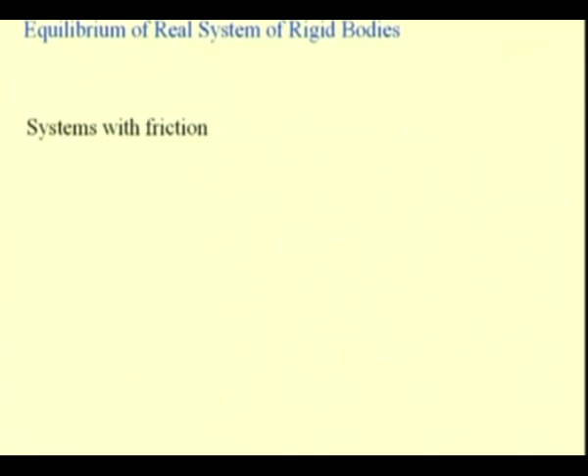Friction does negative work since it always opposes motion irrespective of the direction of the motion. We have seen that irrespective of the nature of the motion, friction always tends to oppose it, and thus if we consider any virtual displacement, friction will act against that displacement, causing negative work.

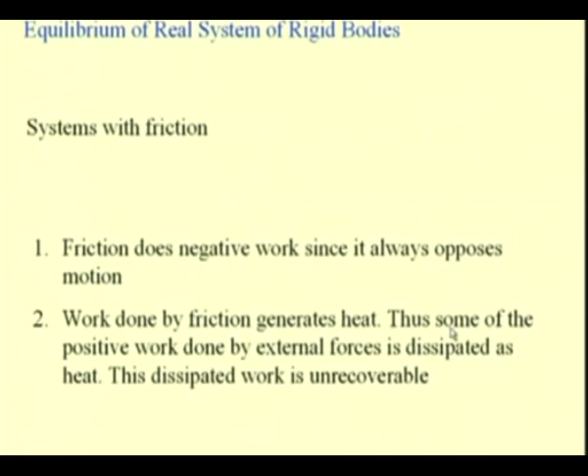The work done by friction generates heat, and thus some of the positive work done by the external forces is dissipated as heat. This dissipated work is unrecoverable and thus causes the inefficiency of a system. Because of friction, some of the work done by external applied forces is dissipated as heat, and this is unrecoverable.

So let us consider the block with friction sliding on a surface, which we have used to analyze friction problems. Here we see a block with weight W and a force P being applied to move this block against the surface. The contact has friction, denoted by this force F. This is the normal reaction N that supports the weight.

Let us assume that this body is under equilibrium, meaning this force P is less than the maximum allowable force that exists as friction at this contact surface. In that case, we can analyze this problem to find the unknown force F by considering a virtual displacement.

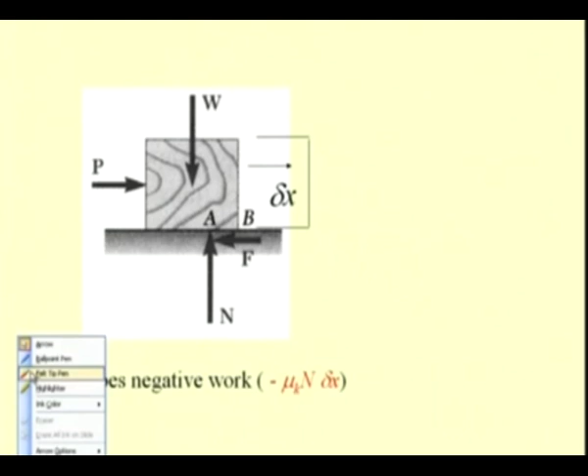But if the problem is to analyze the efficiency of a system with friction, or to find the efficiency of this way of pushing the block across the surface to move it from one place to another, then the object is actually in motion and the force P is more than the limiting value of friction available at this contact. So this frictional force F in such a case will be the dynamic or kinetic friction, which will be equal to mu k times N.

Now, if we would like to know the work done by this frictional force, let us consider a virtual displacement delta x in the forward direction, or the direction of the applied force. So the work done by this applied force is P times delta x. This is the input work.

This is virtual because we are considering a virtual displacement delta x, and the friction force, which acts in the opposite direction of the applied force for the same virtual displacement, does negative work equal to minus F times delta x, which is the work done by friction, and in this case it is minus mu k times N delta x. So our equation of virtual work, where delta U equals zero, states that P dot delta x minus this work done by friction, mu k times N delta x, is equal to zero.

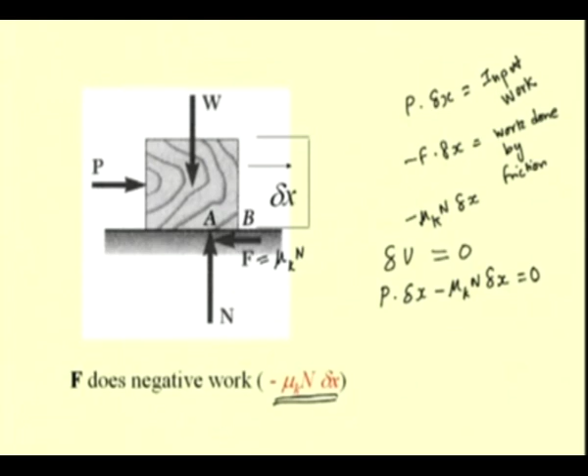So here we see that this negative work term comes into the picture, and the input work is consumed by the friction that exists between the surface and the block.

Let us consider another case where friction occurs in the bearing. We have already seen that the bearing resistance has to be overcome when a wheel is rolled on a surface, and for this moment M to exist, there will be a frictional force F at the point of contact between the wheel and the surface. But if we assume that this point A does not slide, then for any movement of this wheel, this force F does not do any work, because there is no sliding taking place at A. But we see that this frictional moment M has to be overcome at this bearing surface, and thus the negative work is done not by this frictional force F, but by the frictional moment that exists in the bearing.

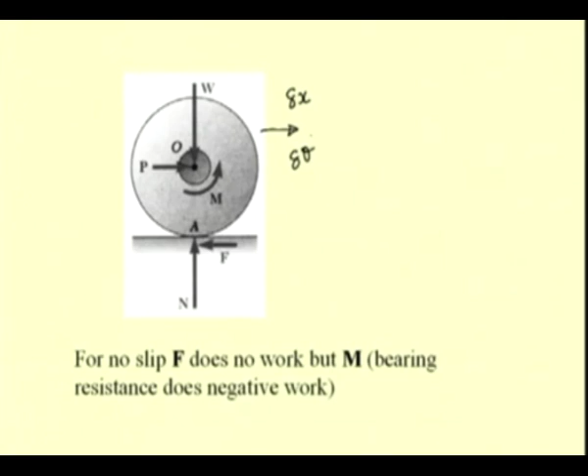So if we consider that this wheel moves forward by a distance delta x, for this virtual displacement let this wheel rotate by an angle delta theta. For a virtual displacement delta x, it is possible to find this virtual angular displacement delta theta if we know the radius of this wheel, and then we get the relation between delta x and delta theta. This is a single degree of freedom system, so the input work is equal to P times delta x, and the work done by friction, in this case the bearing friction, is equal to this frictional moment M times delta theta.

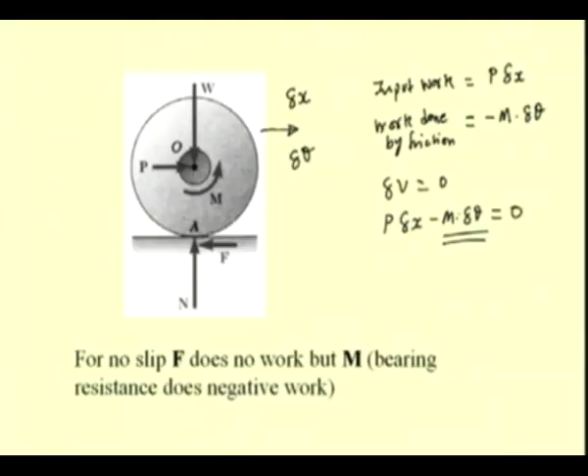The negative sign comes from the fact that the wheel is rotating in the clockwise direction and M is in the anti-clockwise direction, so the work done is negative. From our virtual work principle, this total work done is 0, so we have P delta x minus M dot delta theta equal to 0, and this is the negative work done by friction. So in real systems we see that a negative component of virtual work exists for each of the frictional effects, either sliding or in case of pure rolling motion.

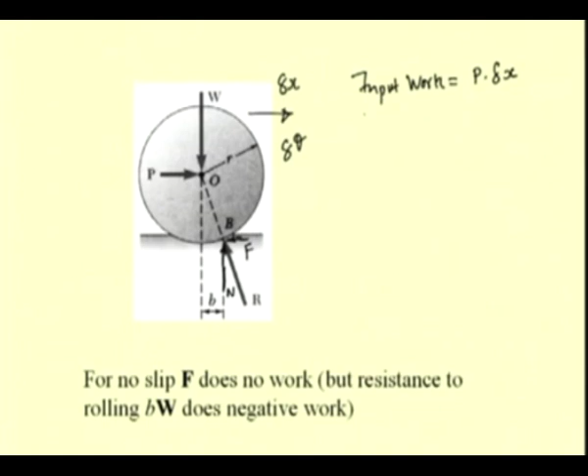and the negative work done by rolling resistance is given by the rolling resistance bW times delta theta, which is a negative work. This comes from the fact that the rotation is in the positive direction, that is delta theta is in the clockwise direction, and we have this moment in the anti-clockwise direction. The moment of this force is in the anti-clockwise direction about this point B. So we have the total work, that is delta U equal to 0: P dot delta x minus bW dot delta theta equal to 0.

So in this way we can see that the work associated with friction or rolling resistance is always a negative work, and it is to be accounted for in the virtual work equation if we are interested to determine the equilibrium condition or to find some unknowns. And this negative work is not recoverable, it is lost as heat. In case of rolling resistance, this heat is released by the expansion of the compressed or deformable material, so again this work is not available.

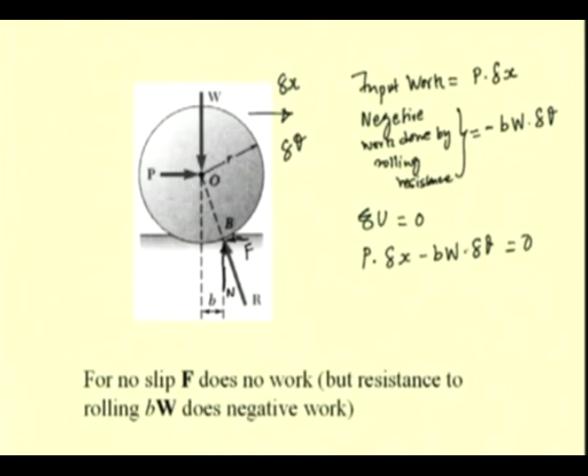So with this understanding, let us try to see how friction acts in the joints of connected rigid bodies. Here you have this link, two links connected at this joint. Let the two links for this particular position be at an angle of theta, and let us assume that there is a virtual displacement of this link in this direction - this is the positive direction of the virtual displacement. So if friction exists here, if we are considering the effect of friction at this joint, then the moment due to this friction does negative work when we consider this virtual displacement.

So for a better understanding, in this picture we have dismembered the assembly in order to account for this frictional moment, because if we take the free body diagram of the complete assembly, the frictional moment cannot be accounted for. So we have to dismember it in order to account for these forces, which become now active forces, thus doing the negative work in each of these bodies.

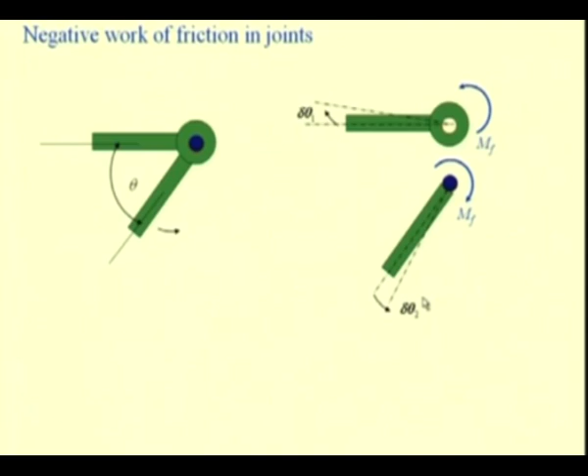Same way, the link that is shown here moves in this direction, that is delta theta 2, for the positive virtual displacement, and this frictional moment MF is again against this delta theta, where MF is in the clockwise direction and delta theta 2 is in the counterclockwise direction. So, we see that always this frictional moment is against the virtual angular displacement that we are considering.

So, if you would like to find the total work done by these frictional moments, that is delta u, is equal to, since both these are against this virtual displacement, they have this negative sign: minus MF delta theta 1 minus MF delta theta 2, which is equal to minus MF times delta theta 1 plus delta theta 2, which is the total virtual displacement that we are taking for the particular joint.

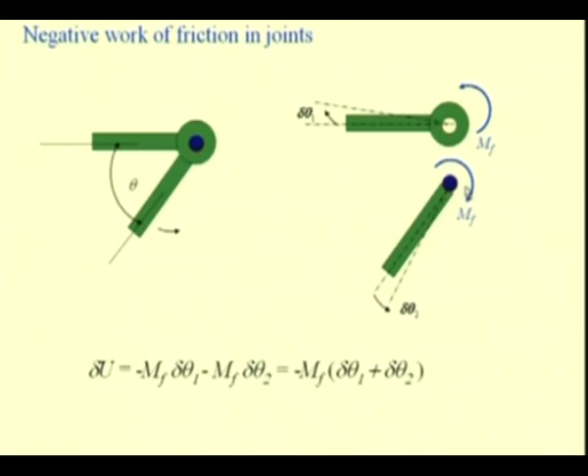So, this has to be accounted for in the systems when we analyze real systems, when we consider friction to exist in the connections between the various links.

Now that we have seen that the friction dissipates energy in the form of heat, we can define the efficiency of a mechanical system as the ratio of the available energy to the input energy, where the available energy is nothing but the input energy minus the energy lost because of the heat dissipation due to the presence of friction. So, in all systems where we have either the sliding action or where we are considering the bearing friction, as in this case of the joints,

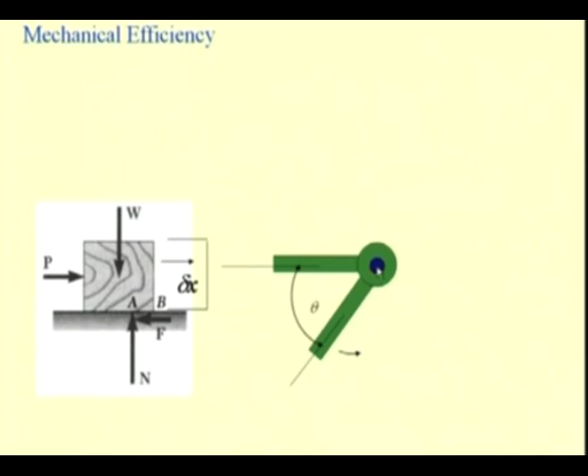we can account for the work done by these frictional forces and compute efficiency as the work output divided by work input, where the work output or the work that is available is equal to work input minus work done by the friction,

and this work done by this friction is minus F delta x, as in this case where the block is sliding, and here as we see in this revolute joint where we are considering the bearing friction in the joints, we have the work done by the frictional moment MF, and we have the work done by the friction as minus MF delta theta. So, these terms have to be accounted for and we can find the efficiency of the mechanical system.

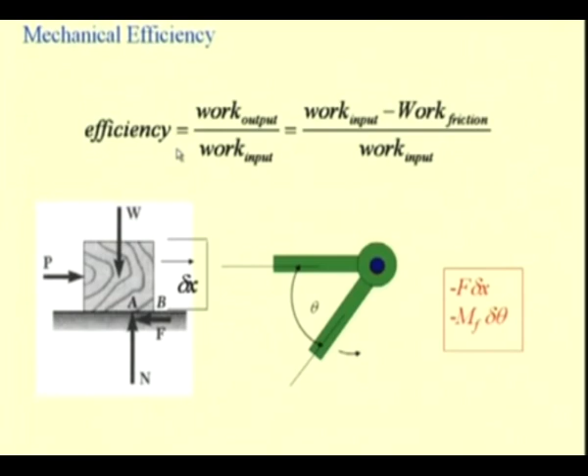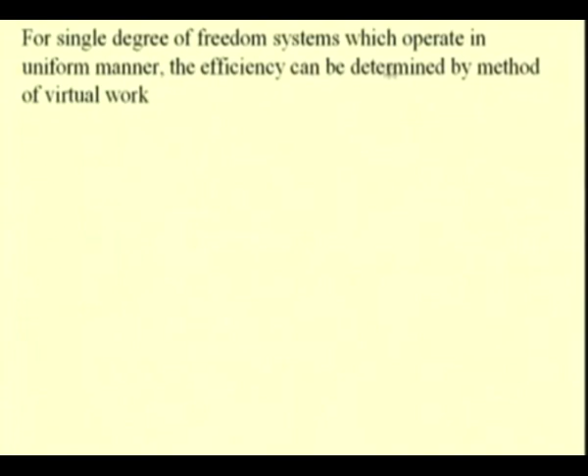So, for single degree of freedom systems, in this discussion we will limit our analysis to single degree of freedom systems that operate in a uniform manner. The efficiency can be determined by this method of virtual work. So, we will see a few examples.

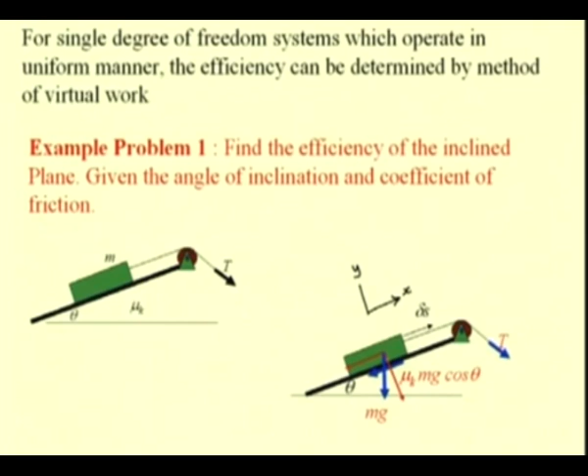So, this force T does work by displacing this cable by this virtual displacement delta s. So, we have accounted for all the forces, that is the tension or the force that is being applied, and the weight of the block being raised, as well as the friction between the block and the inclined plane surface.

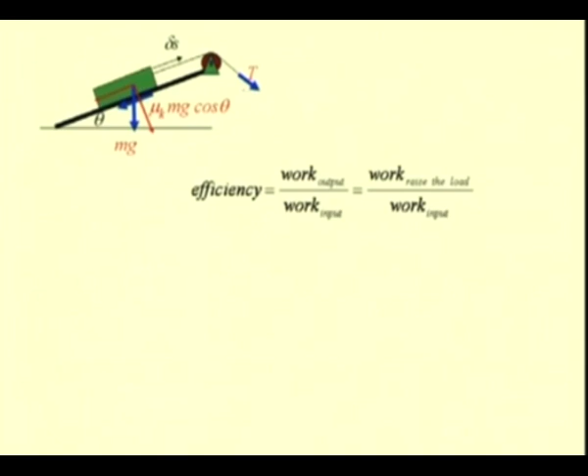So, now let us write the virtual works that are involved for this virtual displacement and find this efficiency by writing that work output, which is nothing but the work that is used to raise the load, and work input is nothing but the work done by this force T for raising this load.

We can write the work done to raise this load as mg sin theta delta s, which is the component of this weight mg in the direction of delta s, divided by the input work, which is T times delta s. If delta s is the virtual displacement of this block, then this force T is also virtually displaced by an amount delta s. So T times delta s is the work input, and the work output is the work done to raise this weight, which is mg delta s sin theta. Dividing this by the input work T times delta s gives the efficiency.

So that is the input work. What are we doing? We are writing the work input as the work done to raise the load plus the work of friction.

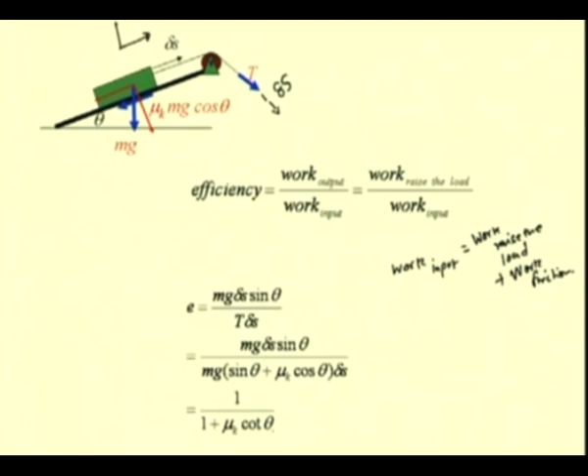Now we can remove these common terms and find this efficiency as 1 by 1 plus mu k cot theta. So we see that this method of virtual work can be used to find the efficiency of a system.

Let us consider another example where the working principle of this screw jack depends upon the friction available between the square threads and the base. We have already solved problems on this screw jack, but here we are interested to find the efficiency of this screw jack in raising this load.

So let us consider here a screw jack with a helix angle of alpha, the friction angle let it be phi k, or the coefficient of kinetic friction is mu k and the corresponding friction angle is phi k, and the mean radius of this screw is r. Input moment m, which equals P times this moment arm for the force applied on the lever, is given to raise this load W by, say, a virtual displacement delta S.

So let us consider that this weight is being raised by a distance of delta S when this moment M acts for an angular displacement of delta theta.

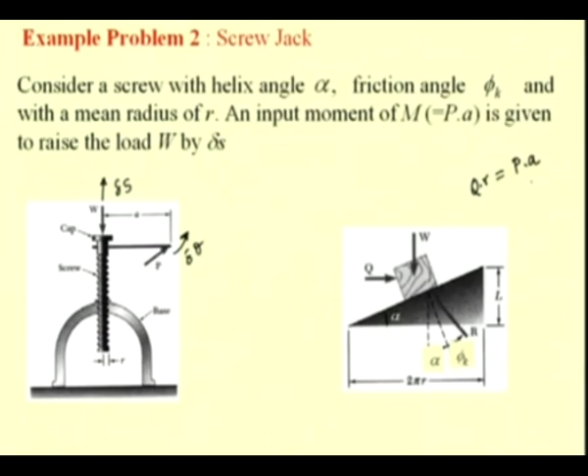Now let us write the virtual displacement. Let this weight W be raised by a virtual displacement delta S. This delta S equals R times delta theta divided by 2 pi r, times L.

We know that if the screw rotates for one complete rotation, that is 2 pi r, the load is raised by a distance L. So if the screw takes a rotation of r delta theta, then this is the virtual displacement, or it equals r delta theta tan alpha.

And we also know that for the raising load on this inclined plane, Q by W equals tan of alpha plus phi k, the angle of kinetic friction.

So now we write that M delta theta, which is the input work, equals Q times R delta theta, which equals W times tan of alpha plus phi k, times R delta theta, because Q can be written in terms of W tan alpha plus phi k from this equation. And we know that M, which equals P times A, is also equal to Q times R. So this is the input work.

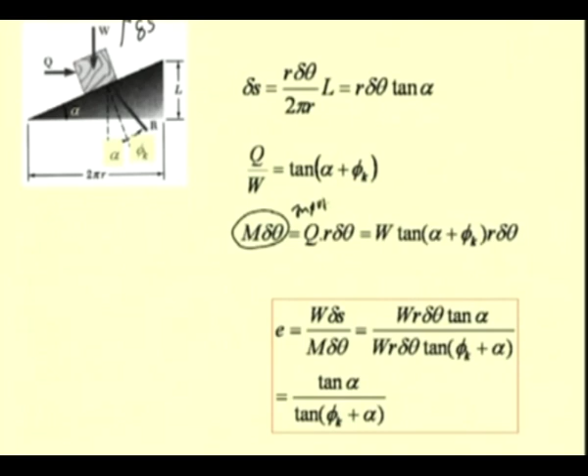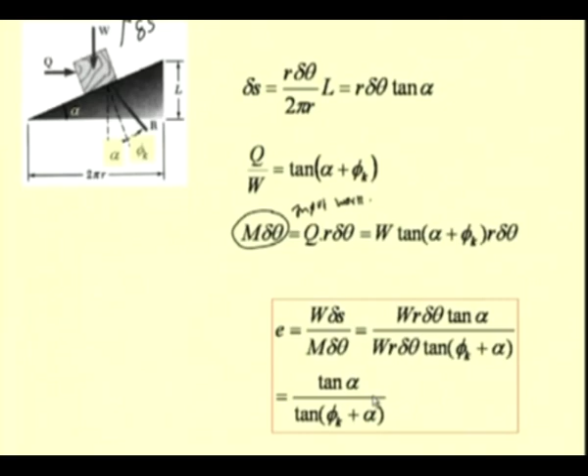Efficiency can be defined as the work done to raise this load, that is W times delta S, divided by the input work, which is m delta theta. So W delta S equals W R delta theta tan alpha, which we substitute, divided by m delta theta, which we found to be W tan alpha plus phi k times R delta theta. Removing the common terms, we get efficiency as tan alpha divided by tan of phi k plus alpha.

Similarly, it is possible to find the efficiency of the screw jack when the load is being lowered, in the same way as we proceeded for this problem. So we see that this concept of virtual work can be effectively used to compute the efficiency of the mechanical system.

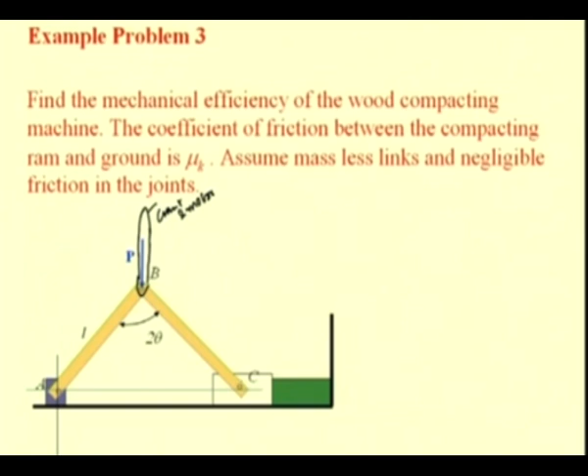First, let us construct what is called the active force diagram, where we consider all the forces that will do work when a virtual displacement is given. You have to remember that in the case of real systems, you also have to consider the frictional forces that exist in the active force diagram, because these frictional forces cause negative work.

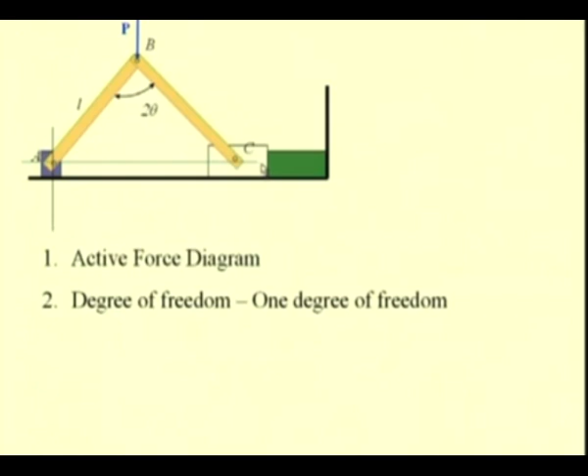Then we have to determine the degree of freedom. In this case, we see that this system is a single degree of freedom system. That means the position of these various links, say AB, BC, the position of this ram or the position of this joint B, can be uniquely defined if we specify this angle. Let it be 2 theta, or we can take another coordinate, say the coordinate of this B.

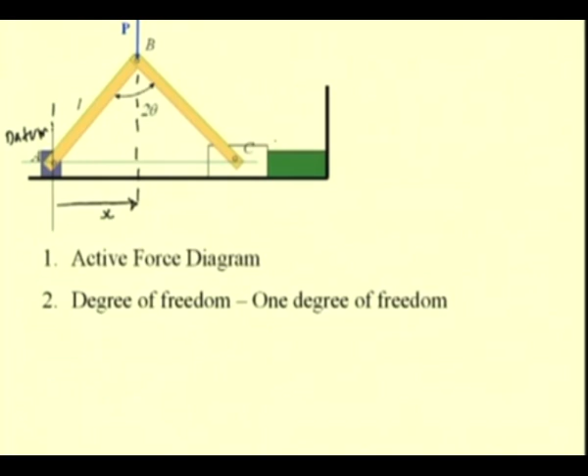From this datum, say we define this as our datum, then if we define this x, then also the configuration of the various links, the position of this ram, can be determined. So we see that this system is clearly a 1 degree of freedom system.

We determine the virtual displacement consistent with the constraints and apply the principle of virtual work to find the unknown forces, and in this case we are interested in finding the efficiency. Once we have found the unknown force, or in this case the frictional force, we can find the efficiency of the system.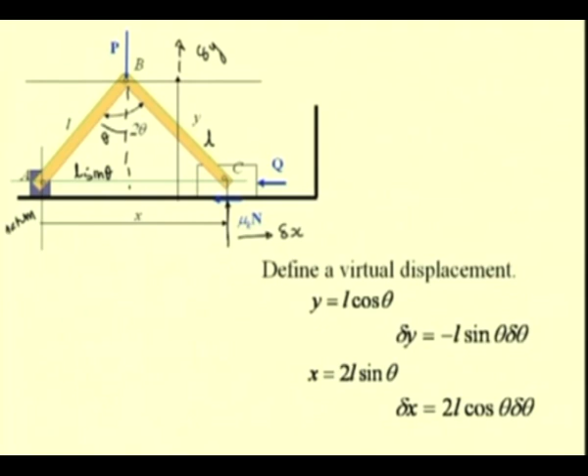Again we see that this delta x and delta theta are positively correlated, in the sense if theta increases or the links expand, this C moves in the forward x direction, so the virtual displacement delta x is in the positive direction. This kind of physical correlation has to be done in order to check whether the virtual displacements have been correctly written. Now we have these virtual displacements delta y and delta x.

Now, in order to find this frictional force, that is mu k n, which is the unknown force, we have to consider the free body diagram and solve by considering the equilibrium equations. We have already seen that when we have friction in the system, we have to go by our traditional methods of equilibrium to solve for the unknown, because the virtual work method doesn't give any additional advantage. So we determine this frictional force mu k by considering the free body diagram, and since we are interested to determine only this mu k, let us consider the moment about this point A and equate it to 0.

We have n is equal to p by 2, because these two forces are passing through this joint A, so they do not have any moment component. So when we sum this and equate it to 0, we have p times this distance, that is x by 2, is equal to the normal reaction n times x, and from this we have this normal reaction n as p by 2. Once we know this normal reaction, we can determine the frictional force as mu k times n.

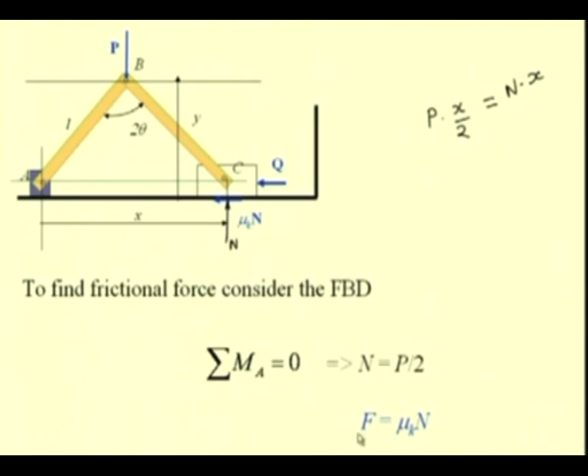Now we know this unknown force F, and so now we can write the virtual work done by all these forces, that is this input force P, this resistance force Q, and the frictional force mu k n, and the total virtual work we equate to 0 to solve for the variable. So we have delta U, the total virtual work, as...

Minus Q delta x, because the positive virtual displacement for x is in this direction, and this force Q is opposite to this positive virtual displacement delta x. So we have minus Q delta x, and this P is also in the opposite direction of the positive virtual displacement delta y, so we have minus P times delta y. This frictional force F is also in the negative sense with respect to the direction of this positive virtual displacement delta x, so we have minus F times delta x, equal to 0.

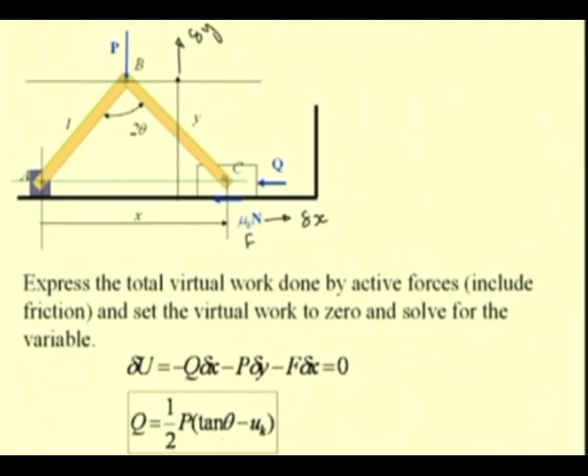So let us now write the expressions for delta x, delta y, and then solve to get this force Q, which is the unknown force. So we have it as 1 by 2 times P times tan theta minus mu k, the coefficient of kinetic friction. So now we know this force Q, which was the unknown force.

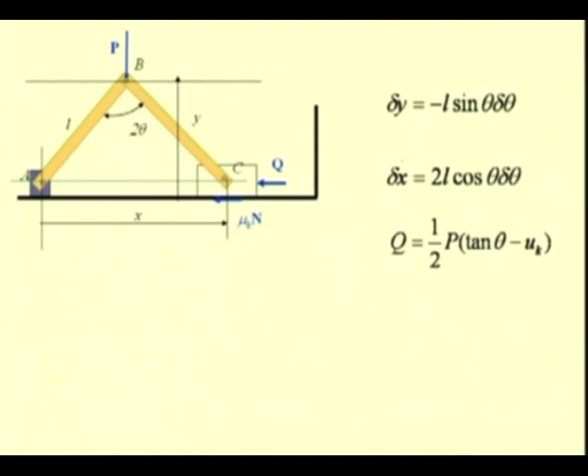Now let us try to write the efficiency. These are the values of delta y, delta x, and Q that we have just found out. So we can write efficiency E as the work output divided by the work input, which is equal to the work done in the compaction, that is Q times delta x divided by the input work, which is P times delta y.

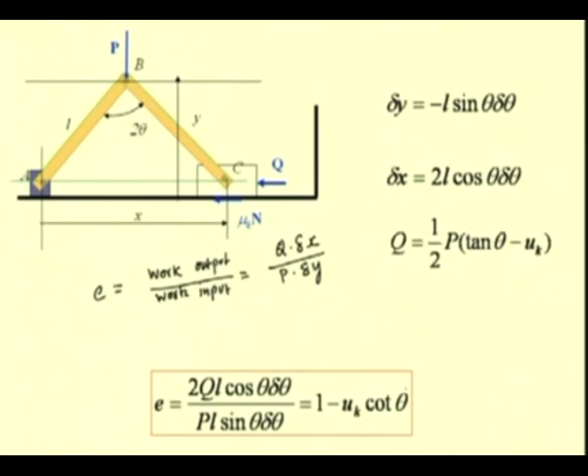So if we substitute these values, that is delta x, delta y, and for Q we have already found it to be 1 by 2 P times tan theta minus mu k, we have this as 1 minus mu k times cot theta. So this problem illustrated how this method of virtual work can be used to both solve for the equilibrium, or we can determine some unknown forces for the equilibrium to exist, and also it is very helpful in finding the efficiency of a real system where friction is involved.